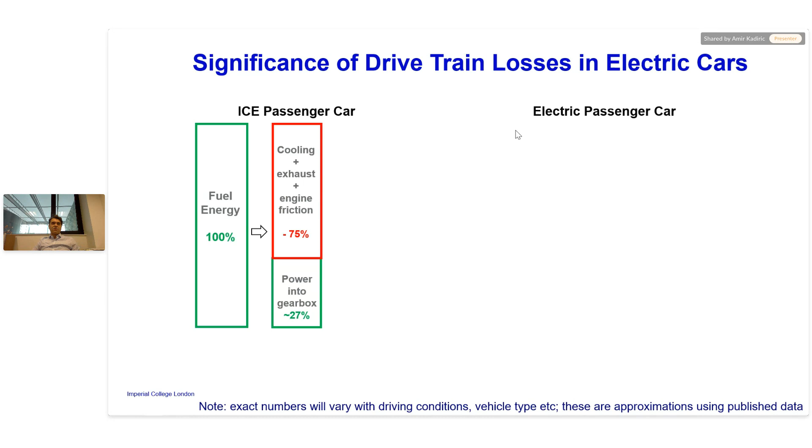So if we start with an ICE passenger car, you have the fuel energy. I'm not talking about where the energy is coming from, I'm talking about the energy on the vehicle. In the case of passenger vehicle powered by internal combustion engine, that's fuel, 100% fuel energy. And a lot of that, about 3/4, is lost in an engine through cooling, exhaust, engine friction, and so on. You can't do very much about that loss because the efficiency of an ICE engine is limited. So that means that only about 27, 25%, whatever, goes into the gearbox. From that, about 5%, thereabouts - those numbers can go up and down - but roughly about 5% is lost in the transmission of the gearbox itself. So the useful power driving the wheels is roughly about 22% of that fuel energy in the tank.

You probably know those numbers, but the interesting thing is if I look at the numbers in red here. If I add 75 and 5 and divide 5 by that, it's only about 6% of the overall loss of energy that's due to losses in the drivetrain.

If I do the same analysis for electric vehicles, starting with 100% energy in the battery, because the electric motor and controller are very efficient, and the charging and discharging process is relatively efficient - there are some losses, but overall only about 15% of that energy is lost. So 85% reaches the gearbox, as opposed to 27% or 25% in the ICE car.

If we assume the efficiency of the electric vehicle gearbox and that of the internal combustion engine vehicle are similar, I'm going to say 5% is lost. You could argue that's not quite right, but let's say it is. That means you have 80% of battery energy available to drive the wheels. That's a big difference, right?

22% versus 80%. But to us, the more interesting number is the ratio of this 5% over the overall losses, so 20%. That means up to a quarter of the overall loss is due to drivetrain losses in an electric vehicle. So clearly, one way to optimize the efficiency of an electric vehicle and extend its range, or for a given range reduce the size of the battery, is to optimize the drivetrain efficiency.

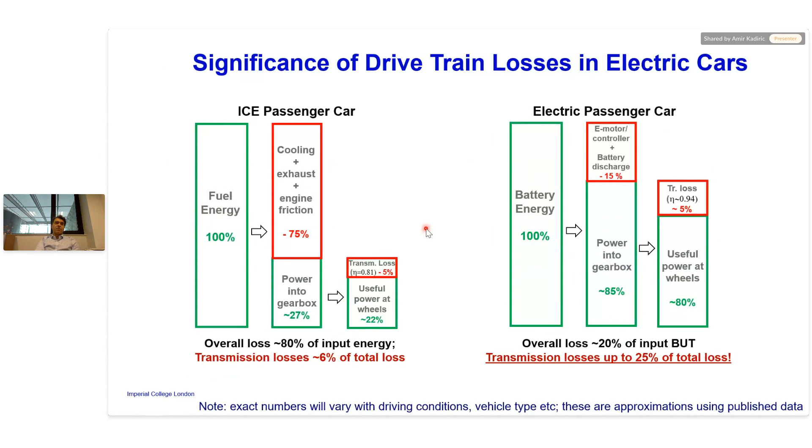I'm sure most people online are familiar with the architecture of an electric vehicle drivetrain, but just to show which part of this architecture we'll be considering for the rest of this talk - here's a simple picture of an electric vehicle, top left, with some batteries, power electronics, the electric motor, and the gearbox. These three parts are usually combined into something called an electric drive unit. A picture of a real electric drive unit is shown here - it's relatively small, much smaller than an internal combustion engine and transmission.

If you open this up and look inside, you see what's shown on the right-hand side. I'll go through it briefly. Here we have the electric motor - the rotor shaft and the stator. Then we have some transmission bolted onto it. The transmission is usually, not always, a two-stage single ratio transmission.

What we have is the input stage here, the input pinion, the intermediate shaft with the wheel and pinion, and then the output stage wheel. Then you have some differential, which drives the wheels. Each of those three shafts is supported by bearings - in this particular vehicle there are 7 of them because there's an extra bearing here.

In addition, you have some oil filters and heat exchangers to cool the oil. The pink color here indicates the oil, or what we often refer to as e-fluid - basically the electric drive unit lubricant. In this example, I'm illustrating that the same fluid is used to lubricate the gearbox on the right-hand side and cool the motor on the left-hand side. Hence I've used the same color everywhere. There'll be certain immersion depth and so on for the gearbox, but the color is just to show that the same fluid covers both.

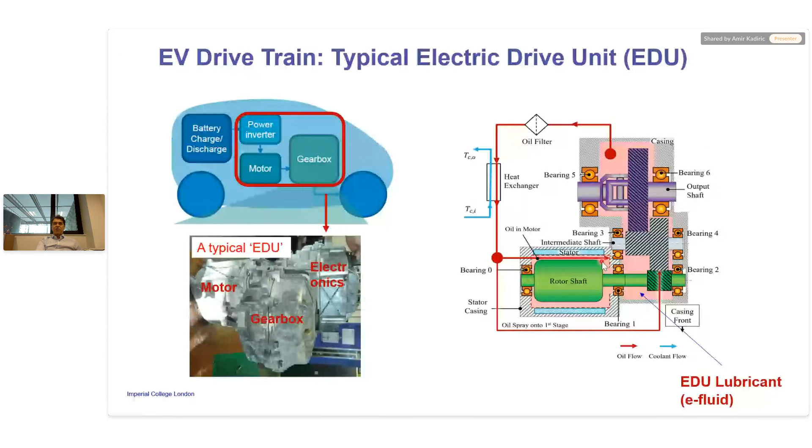So what we want to do is optimize this fluid. We also work in the Department of Mechanical Engineering, so we're interested in optimizing the actual architecture of this. But today I'll be talking mainly about optimizing the properties of this fluid in terms of efficiency.

So what are the challenges? I've got a list here, and I apologize that this slide is quite wordy, but hopefully you can read it for yourself. The main point to take away is that this e-fluid is subjected to competing challenges. Electric vehicle drive units operate at quite high speeds, because you want to run the motor at high speeds, reduce the size of the rotor, and so on. There are some very good arguments why you would like to run that motor at very high speeds.

What that means is that you're churning a lot of oil, and the bearings and gears are going at high speeds. If you want to reduce losses at those speeds, the generally accepted wisdom, which may or may not always be true, is that you need a low oil viscosity.

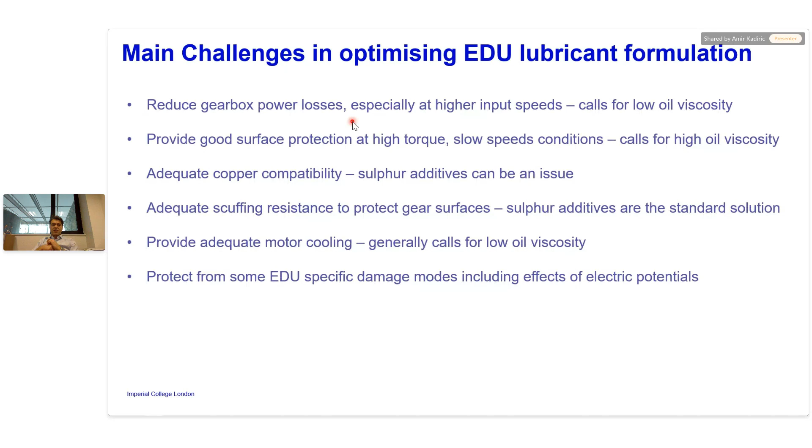Now on the other extreme, when you have very low speed, or you're just moving off with an electric vehicle, you're producing high torque just due to the torque-speed characteristic of an electric motor. To protect the surfaces under those conditions, where you cannot rely on a thick enough hydrodynamic film, you really need a higher oil viscosity - a specific formulation to protect surfaces in boundary and mixed lubrication. So you have an issue: on one extreme you need low oil viscosity, on the other you want high oil viscosity.

It doesn't stop there, unfortunately. If you're using the same fluid to cool the motor and lubricate the gearbox, you have to think about copper compatibility, so sulfur additives can be an issue there. But these gears can also scuff - scuffing is one of the most common gear failure modes, and if you have high loads and high speeds, scuffing becomes more likely. So sulfur helps in that respect.

So you have this competing requirement: do you put sulfur in, do you remove sulfur, high viscosity or low viscosity? Where is the optimal? Clearly you can't satisfy all of those at the same time, and that's an important message to take away. The e-fluid properties have to be a compromise to address these system-level competing challenges. They're not necessarily the best solution for any one of those challenges, which is a bad thing, but also a good thing in a way, because it opens up the possibility of using some unconventional fluids in these units, as we will discuss a little later.

You also need to cool the motor, so that also requires usually a low oil viscosity as well as high heat capacity and so on.

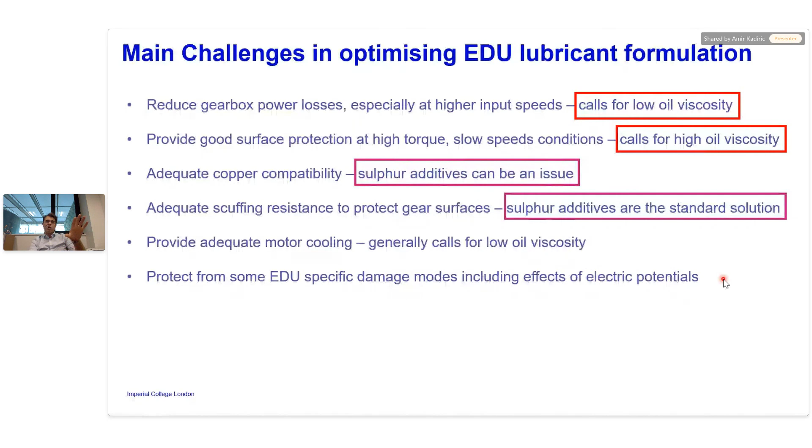And finally, while considering efficiency, we mustn't forget that we also have to at least keep the same level of reliability. We need to resist certain damage modes like scuffing, and of course other standard damage modes for gears and bearings - pitting, micro-pitting, and so on. But in electric vehicle drive units there's a specific damage mode due to electric potentials, which is another area we are studying - I'll touch on it a little in this talk, though the talk mainly focuses on efficiency. Whatever e-fluid you choose has to deal with reliability.

So it's a bit of a mess - it's a fast-moving area. There's a huge amount of research in this, because all of a sudden we have these different requirements, and we can't use the fluids that we've been using for tens of years in internal combustion engines.

So there's an opportunity there for somebody to come up with a fantastic fluid that can do all of these things, but it's also a challenge. To aid those challenges, we do need some new tools to find out what is this balance between these competing requirements on the system level. What we are trying to do, and what I'll show you today, is how we're using tribology to try to find this optimum compromise by considering the whole system.

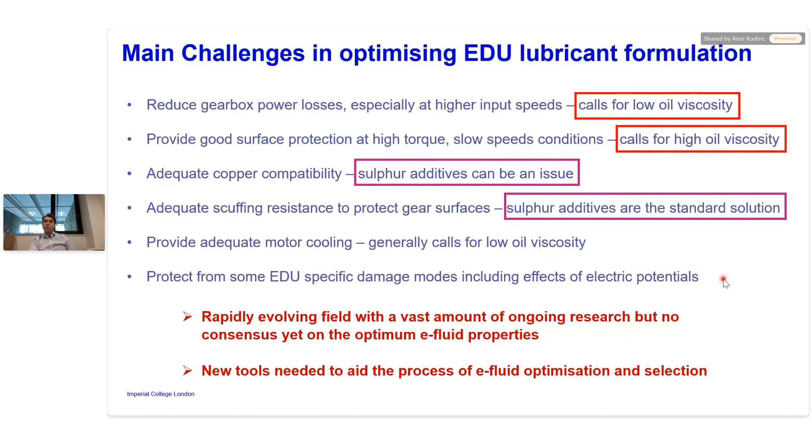So what are the main tribological challenges in doing so? I've listed three here. There are many others, but I think those three are quite important, kind of ranked. The first one is the high speeds.

Unfortunately, the speeds encountered in electric drive units are higher than most current tribometers have been designed to deal with, which means that if you are testing frictional wear properties of particular fluids, we can't reach the speeds that these electric drive units—the gears and bearings in the electric drive units—operate at. So we need to think a little bit about how to address that, and I'll show you what we've done in that respect. We are getting there. There are some new test rigs that allow us to do that better.

Number two: well, we are tribologists, so if you go to a store and buy oils that have the same specifications, we like to think that we can tell a difference between them. Otherwise, we're wasting our time because they're not the same in terms of friction, in terms of wear.

Now, if you want to distinguish between two same-specification oils in terms of the impact on overall losses on an electric vehicle while it's being driven through London, it does require a quite detailed analysis from a tribological point of view, where those losses come from. And crucially, absolutely crucially, it requires measurements to characterize those fluids. So even though the specs are the same, they certainly have differences in terms of overall EV efficiency, as you will see later.

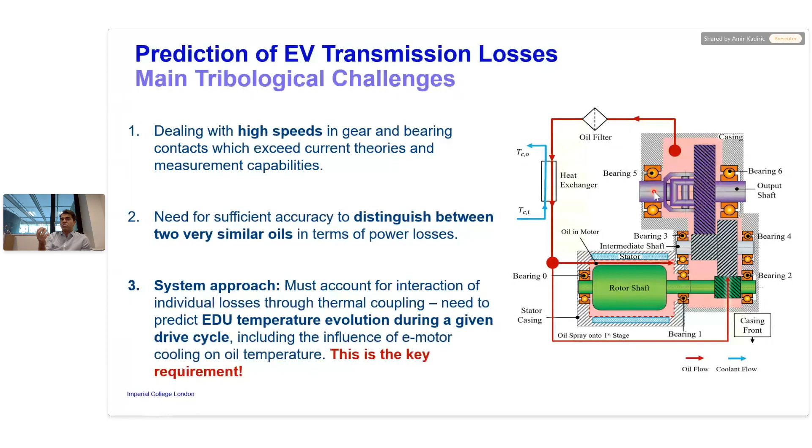And the idea is to end up with a number of kilowatt hours energy loss, because for most manufacturers it's kilowatt hours that matter. That's equivalent to dollars. So number 3 is really the key requirement: a system-level tribological approach to predict the evolution of the EDU temperature and hence the interaction between these losses. This is why it's important.

What I have here is an example from a simple gearbox—not from an electric drive unit, but a simple one-to-one, single-stage gearbox that illustrates this. As you have losses in bearings, gears, and churning, the oil temperature in the gearbox will change. It will increase, and as that increases, it will change the oil properties, primarily the viscosity, as well as other properties. That means the friction in the gear teeth contact, the drag losses in bearings, or the churning will change. So your power losses are now different, and you're pumping a different amount of oil in here.

In a normal gearbox operating at steady state torque and speed conditions, say driving a fan, the calculation is quite simple because you reach an equilibrium temperature depending on the ambient conditions. You can then use those operating equilibrium temperatures to work out your oil properties and hence your losses.

Unfortunately, in a moving vehicle that's not the case, because the torque and speed going through the gearbox are changing non-stop. So the temperature of the gearbox is evolving.

What I have on the right-hand side is a simple gearbox where we started at 25 degrees, and we've evolved the temperature as the gearbox is operating at 0.6 hours in this time. In yellow are the total losses, so I've added all the gear losses, all the bearing losses, all the churning losses.

But the bottom two curves are the interesting ones. What you see is the mesh loss in gears going up as the temperature has gone up, while bearing loss is going down.

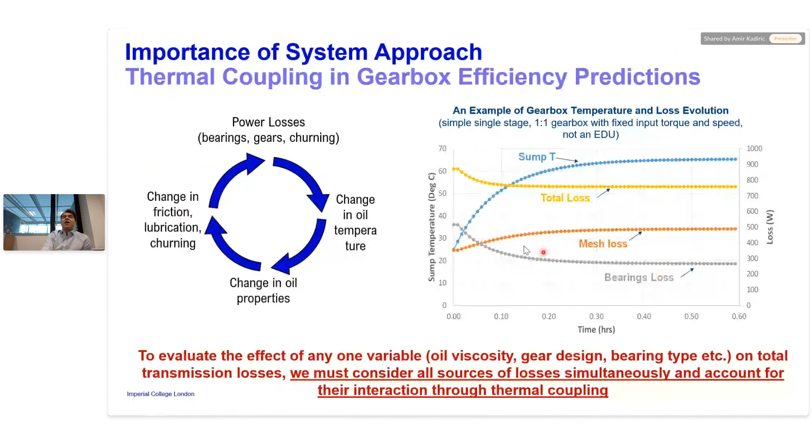Whereas bearing losses, which we generally tend to have smoother surfaces than gears, like lower viscosity, so the losses in bearings have dropped. This needs to be accounted for on a system level throughout the whole duty cycle if you are to optimize the e-fluid. That's what we are trying to do with this tribological system level approach.

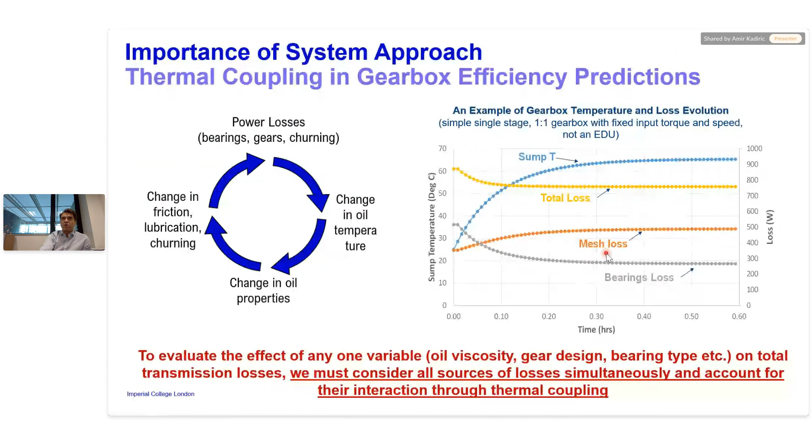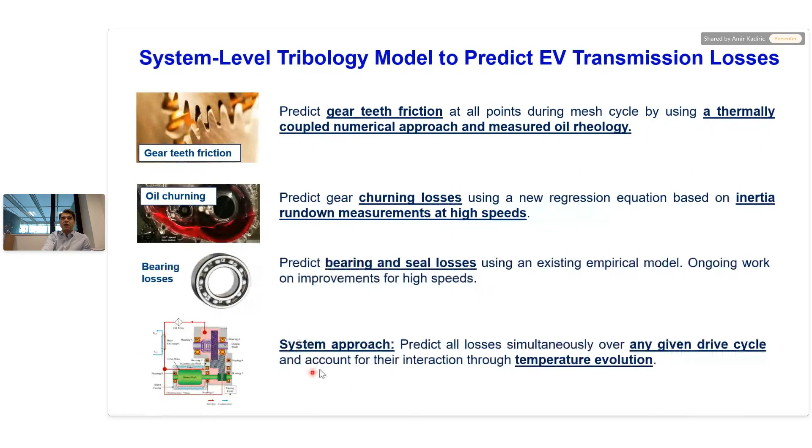So I'm going to consider gear teeth friction, and I'll show you how we do this. I'm going to consider churning losses, and I'll show you a bit how we do this because it's different from published sources—we recently published our own work on that. I'll tell you how I do bearing and seal losses, which is based on existing models that we're working on improving, but at the moment we're using other people's existing models. Finally, I'll tell you how we combine them all into the system level approach.

So first of all, gear teeth contact losses. There's a little bit more tribology here than in the rest of this talk, for those of you interested in more technical detail. We are using a relation between shear stress and shear rate for a fluid.

In this case, I'm using a Johnson-Tevaarwerk relationship. You can plug in your own one if you don't like this one—it's a plug-in to the model.

What this does is: for given conditions, given shear rates, for a fluid expressed with its viscosity and some of these constants, I will get the shear rate, and then this shear stress. If this shear stress is higher than some critical shear stress, I'm having a limit of tau equal to tau-c.

This viscosity here is the viscosity of the oil at the temperature of the contact. So in the diagram here we have the two surfaces, and we have the oil in the middle. The temperature here in the contact, indicated by this T-oil, red circle, is the temperature we need to work out this viscosity.

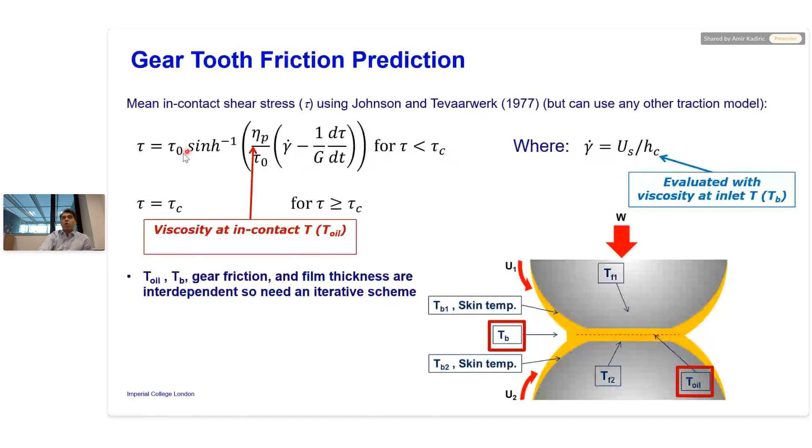The shear rate, gamma, shown in this equation on the right-hand side, is worked out by sliding speed divided by central film thickness. The central film thickness needs to be worked out or measured at the temperature of the inlet. So you have these two temperatures that you need to work out for a gear teeth contact in order to work out a relation between shear stress and shear rate.

Now this requires an iterative model. We use an existing model by Olver and Spikes, two colleagues of mine, and also an update from a postdoc of mine, Rycerz, and myself, published in 2019, along with some COMSOL Multiphysics input to work out a heat transfer coefficient.

You can imagine this is quite a difficult calculation because your gear is operating in some complex mixture of air and oil. What is the heat transfer coefficient used to work out how much heat is being lost from the gear, and hence get the equilibrium between the heat being pumped into the contact and being lost, to get a bulk temperature, which is what we need in order to get this relation between shear stress and shear rate.

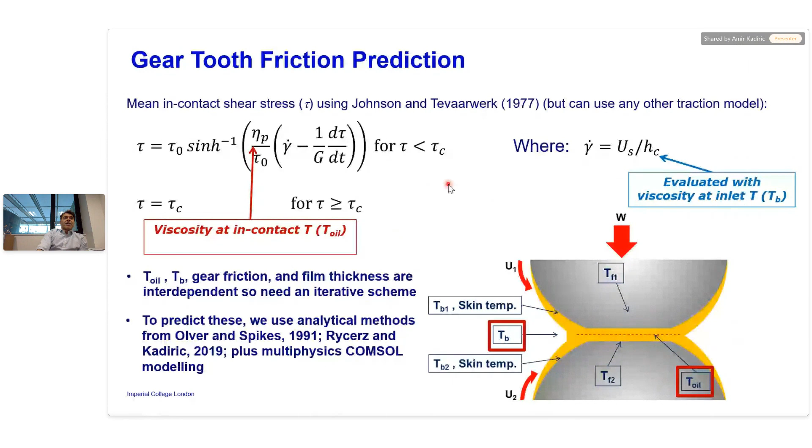Then we get our tau bar, and then we put it into this relation.

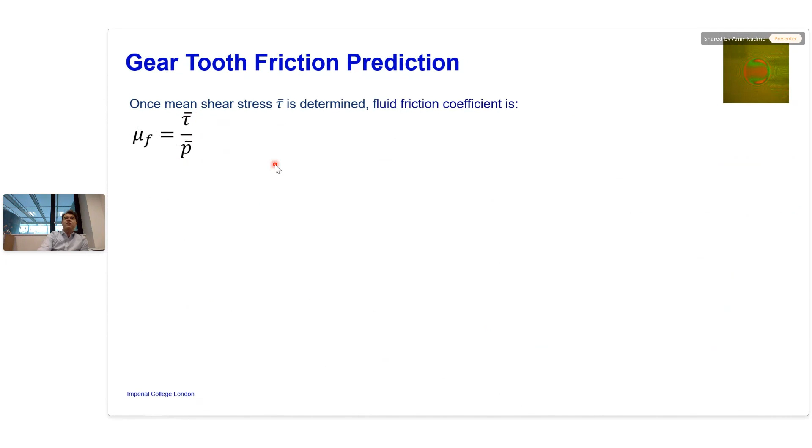We divide the mean shear stress, tau bar, by the mean pressure to get the fluid friction. This is very nice, it's fluid friction. Unfortunately, gears don't often operate in full fluid film, not in full EHL film, because they're rough.

So we need to account for the boundary and mixed lubrication friction. In our model, this is how we do it. The effective overall friction coefficient equals the fluid friction we worked out using that relationship I showed you earlier, plus this term, which says it's boundary friction minus fluid friction divided by 1 plus lambda, lambda being the specific film thickness, the ratio of the film thickness to the surface roughness, to some exponent m.

Effectively, what this does is shown in this graph on the bottom right. These are measurements for different surface roughnesses, friction coefficient on the y-axis, difference between smooth and rough - you can just consider it as a friction coefficient - and lambda ratio here. So this relationship effectively fits the friction between the boundary friction shown here at low lambdas, to the fluid friction shown here at high lambdas.

I'm really sorry because this talk is actually going through itself. I can't stop it.

So you can see that this term, as lambda increases, becomes 0, so our friction is just mu f. And as lambda becomes very low, this becomes mu b minus mu f, and mu f cancels, so we get mu b. So we're basically fitting between mu b and mu f.

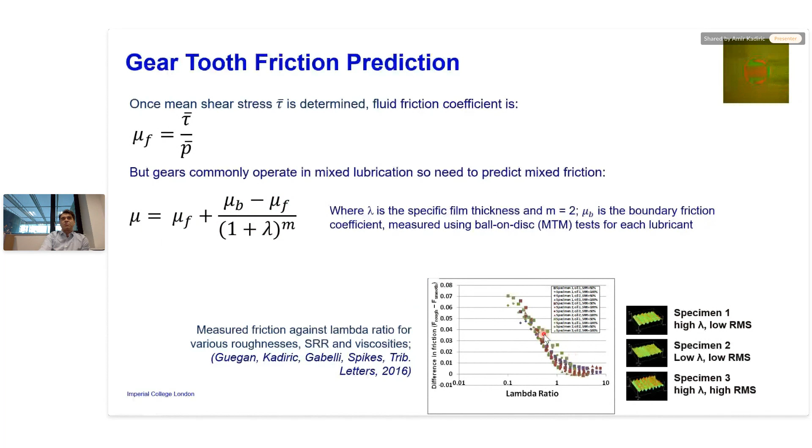Works quite well. We do measurements for our fluid together. The other measurements we do for the fluid are to characterize the rheology of it, and the way we do that is we measure friction coefficients at different pressures, different temperatures, different slide roll ratios, using our ball and disc tribometer, the PCS Instruments MTM.

In this case, we actually use the scaled up version of MTM called ETM, Extreme Traction Measurement Machine, which is very similar, but allows us to reach higher pressures - up to 3 gigapascals for steel and steel contact. So it's a little bit more realistic in terms of conditions that may be experienced by bearings and gears in an electric drive unit.

In parallel, we measure film thicknesses on an optical EHD rig by PCS Instruments. What that then allows us to do is plot a shear stress relationship, which is this mean shear stress, tau bar equals the friction coefficient times the mean pressure on the y-axis, and on the x-axis we plot the shear rate, gamma, which equals sliding speed divided by the central film thickness.

We can then get the gradient of this curve to get our limiting shear stress, tau zero, and get that relationship I showed you in the beginning from this curve. On the right-hand side here you have thermal effects, which you can, but don't have to, account for. Then we can plug our worked out mu f back into this equation, but we also measure the boundary friction coefficient mu b. Now, this is all very nice, and we've been doing this quite a few years now.

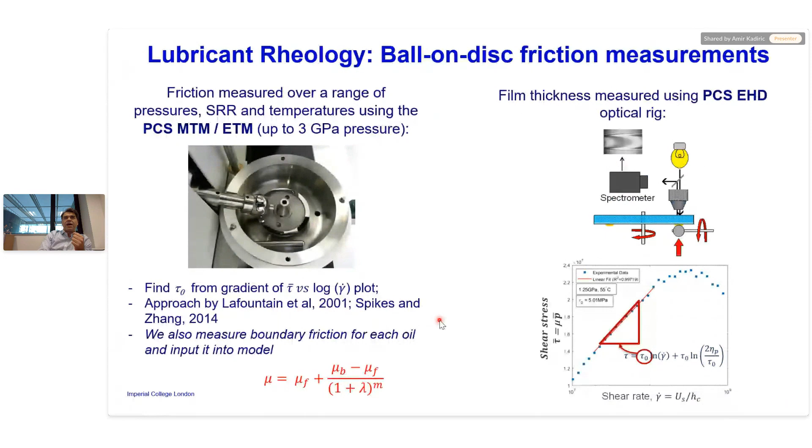I think this method was first done in 2001 and has been updated since. But what you find is that because of the high speed conditions in electric drive units, the normal tribometers I showed you earlier don't really do that very well.

So we've recently started using this high speed tribometer, which is similar to the normal EHD, but runs at 20 meters a second, to measure film thicknesses and traction at speeds much more representative of real electric drive units. So here's a typical electric drive unit.

Bearing entrainment speeds are up to 26 meters a second. Gear entrainment speeds are 18 meters a second. The previous tribometers only go up to 4 meters a second, but this new one does 20 meters a second. I'll show you some results from it.

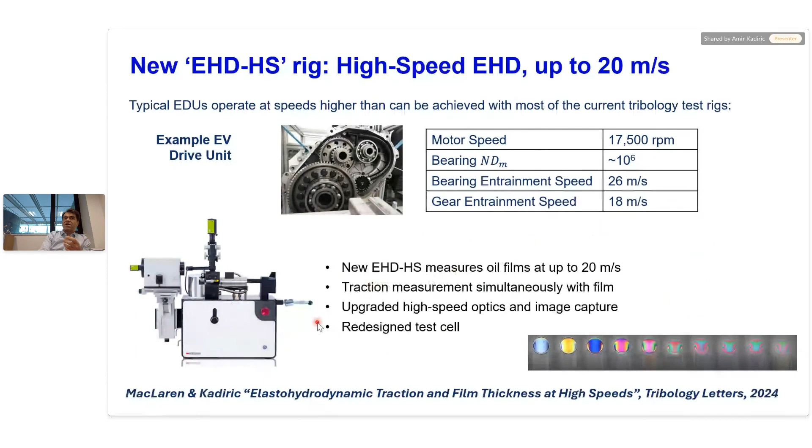This is published work. We've got some film thickness and entrainment speed measurements, very high speeds, up to 20 meters a second - this is recently published, Alex MacLaren's work. You can see that the measured film thickness, shown in these curves, deviates from the predicted film thickness, shown in orange, as the speed increases.

Interestingly, the deviation starts roughly at about 4 meters a second, which is the limit of the existing tribometers. So our current EHD theories don't predict this drop-off. There are compensating factors - some of you might have used things like the Gupta factor and so on.

They don't really predict this very well. They're usually too conservative, but not always. On the right-hand side, this indicates the level of difference between the measurement and the prediction - this is the film thickness deviation percentages, slide-roll ratio, and entrainment speed. You can see in some cases, for some oils - this is a PAO5 oil - you can get a massive difference, up to 40-50%, and in other cases it's less. This is the extremes, if you like. You can see up here, it's very low at low speeds.

So we use this high-speed tribometer to get our friction and film thickness and plug into our model.

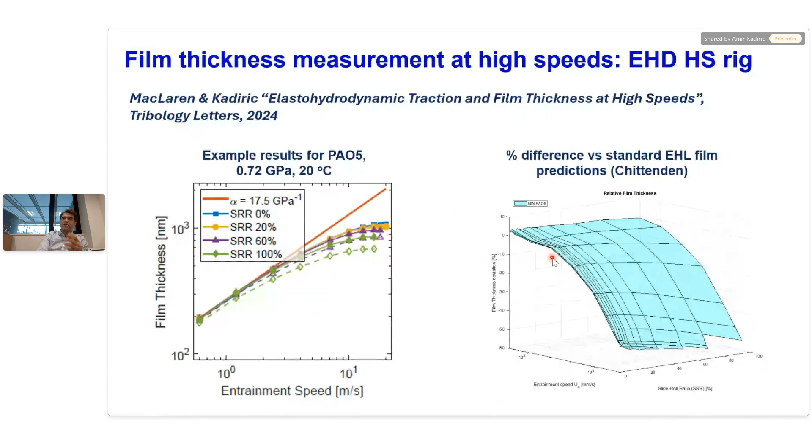Now, that's gear friction. Bearing friction, as I said at the beginning, we use an existing model, due to Guillermo Morales-Espejel at SKF. This is a published model, it's in the catalogs. They call it a four-source bearing friction model because it includes the rolling friction, sliding friction, the seal friction, and the drag losses in a bearing. So this is, if you like, equivalent to gear churning. So when I show you bearing losses later, that includes the bearing churning losses, and when I say churning losses, I'm referring only to gear churning losses.

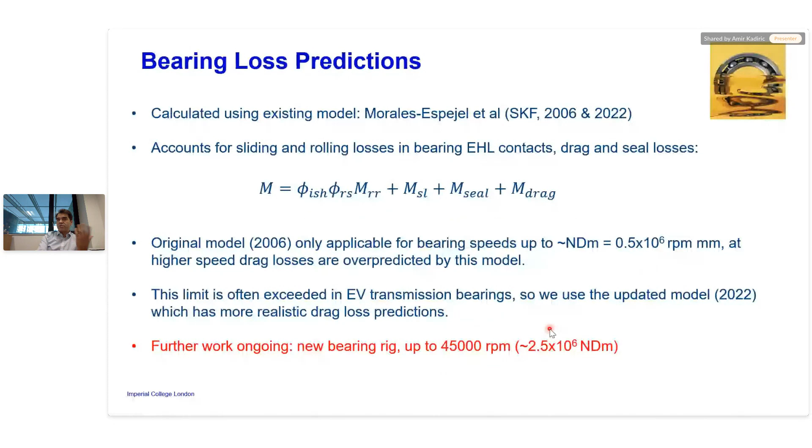The original model was developed by SKF in 2006, and they are at pains to tell the world not to use it if your NDM parameter - which is the bearing RPM speed times the mean diameter in millimeters - is over 500,000. The reason is that at higher speeds this over-predicts the losses because the M drag is over-predicted. They've recently published an update to this model with factors to account for this - not physics-based, it's an empirical factor. So we've been using that model in our current predictions that I'll show you later. However, we've got a substantial amount of work trying to optimize those bearing friction predictions at higher speeds, including a new rig that we can run up to 45,000 RPM or 2.5 million NDM, much higher than the current limit, so that we can apply these measurements and a better model into our EDU loss predictions.

The gear churning losses is the third part of this overall system approach, and here we are relying on our own measurements. The reason for this is that the current published gear churning models, which are empirical, are based on data that doesn't go high enough in speed - usually about 7,000 RPM is the limit. We need to go higher because the speeds in electric drive units are 15, 20,000 RPM.

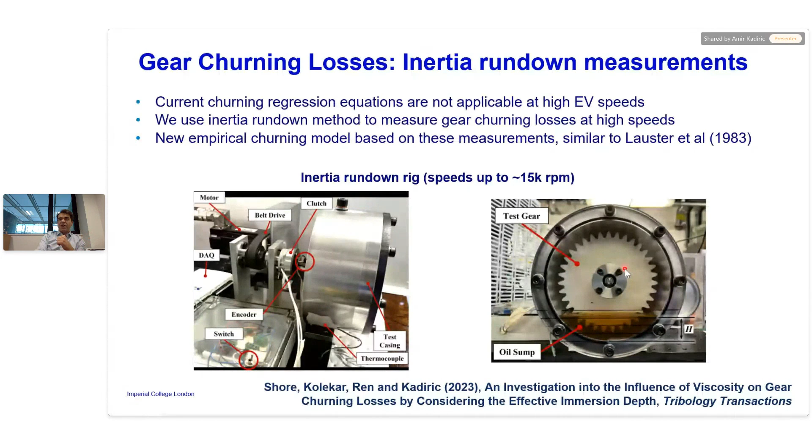So we've done our own measurements, and the way we've done it, we have a simple plastic gear in this case, in this annulus, and we have a sump of oil here. We change the oil, we change the immersion depth, and so on. We get loads of measurements done for different oils, different immersions, different geometry of the teeth, different face width of the gear, and so on. And then we produce our own regression equation, and we use that regression equation, which goes to much higher speeds, in our models. It comes up with some really interesting things, and I want to show you briefly what those are.

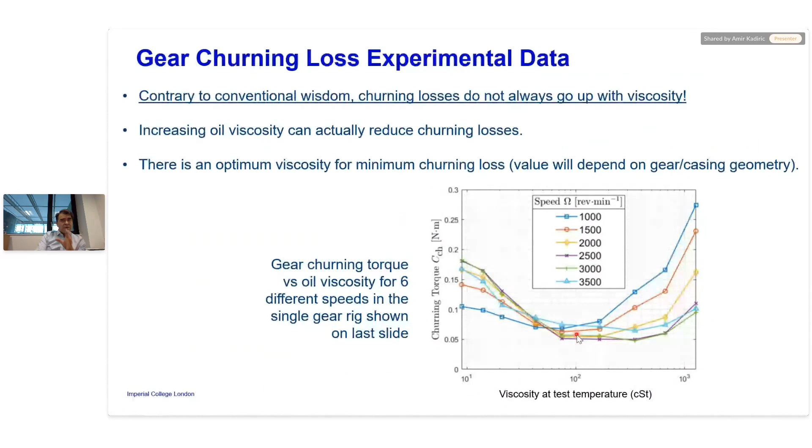What you see is this focus on immersion depth here. This is the oil. We started in each case with each oil at the same immersion depth. This is zero speed. As you run the gear at higher and higher speed, the oil is being thrown up. Some of it comes back. So during actual operation, there's a certain effective immersion depth.

What that effective immersion depth is depends very much on the viscosity of the oil. If you look at this effective immersion depth for low viscosity PAO2 oil at high speed, it's quite similar to the initial fill. If you look at the high viscosity oil, that was the initial fill, but look at it here - your effective immersion depth is very, very small, almost zero. What that means is you're actually going through a smaller amount of oil, smaller depth of oil, and that reduces your churning losses.

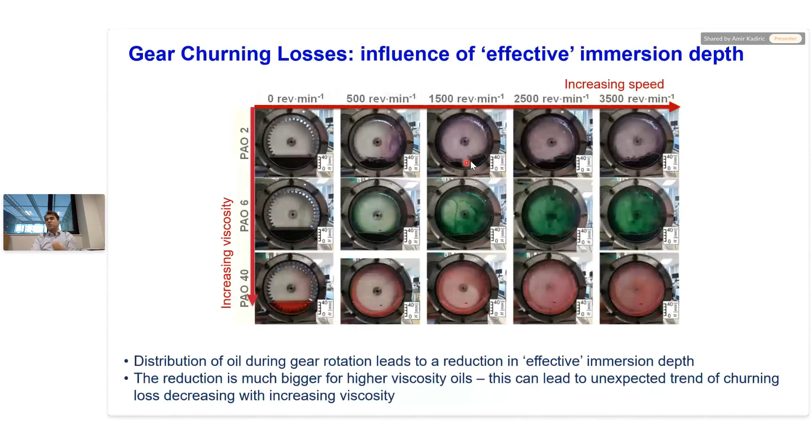Now you might think this is actually specific to this rig, and indeed the absolute values of churning loss are specific to this rig. But we actually did it in a real electric drive unit. So here's a real electric drive unit. The way we do this is we spin up this gear to a certain speed, then we disconnect it and let it slow down due to this churning loss, the drag of oil. And then from the speed-time graph, we get a churning torque. It's called the inertia rundown method. We did the same method here.

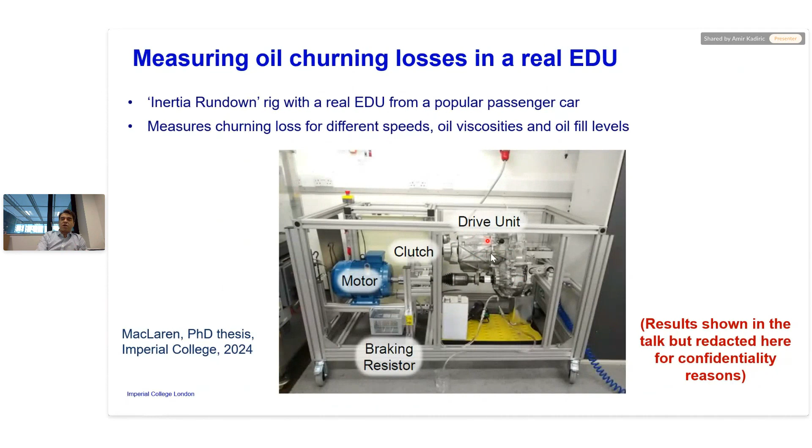This is work of Alexander MacLaren during his PhD. We have an electric drive unit from a popular passenger electric vehicle connected to a motor. We spin it up, we disconnect it with the clutch, we let it slow down - same method as the other rig. Indeed, what Alex found is the exact same phenomena.

These are different speeds, so different vehicle speeds, different RPM. Let's focus on one of the speeds - take this top one, 120 miles per hour, very fast. You can see that initially the torque goes up with viscosity and then it drops, and then it goes up again. So it's not the same place in terms of viscosity, not the same speed and so on, but the fact that you see the drop - generally the trends are the same.

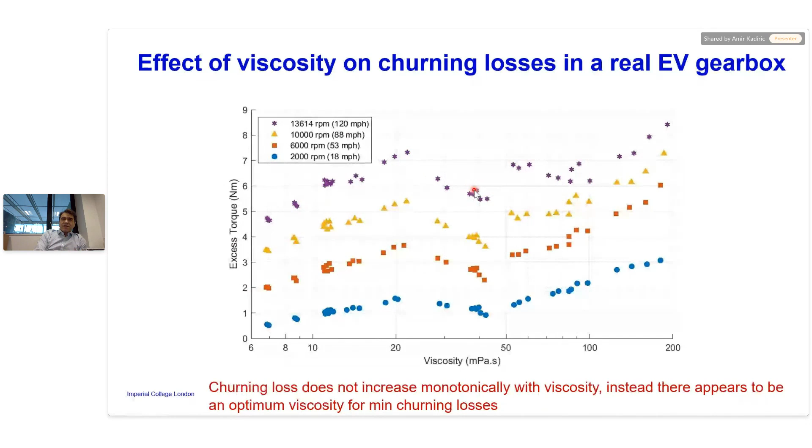In the same gear unit, Alex also varied the immersion depth. This is important because you find that the biggest effect on gear churning losses by far is the immersion depth, not the viscosity. Compare either the red or the green curve - let's look at the red curves. They are at the same speed, 88 miles per hour vehicle speed, 10,000 RPM gearbox speed. So you've got a 1 liter and 2 liter fill of the gearbox - 2 liters is really what it's filled with. You can see this is the churning loss for the 2 liter, and this is for the 1 liter - a big increase, double. So the effect of immersion depth is much more pronounced than the effect of viscosity.

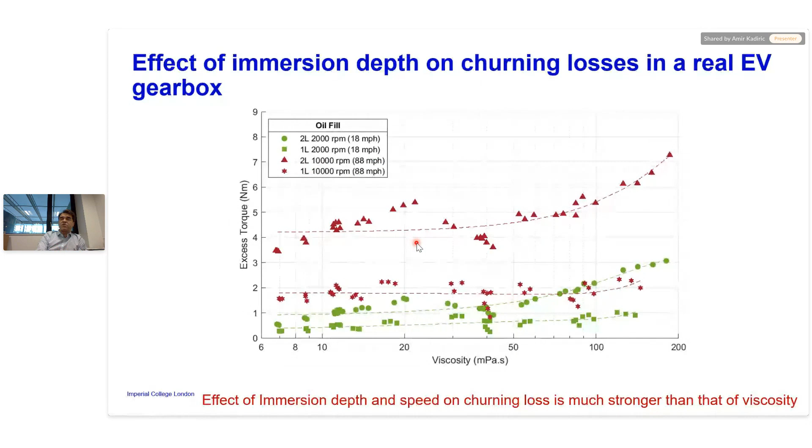The trends we see in terms of churning loss versus viscosity are the same in both our lab rigs, with a single gear and a full electric drive unit.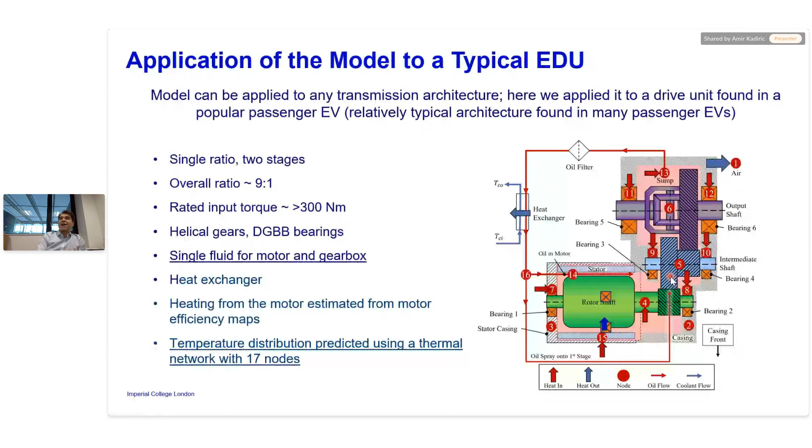To address this temperature evolution and interaction of the losses, what we implemented is a thermal network model. These numbers are the nodes of our thermal network. We work out the losses at each of these points - bearings, gear meshes, and the churning - and the heat exchanges at each point, including in the motor because of the cooling of the motor, in the heat exchanger, between the gears and so on. We allow them to talk to each other to get the overall evolution of temperature as the car is being driven. What Joe and Alex then did is drove that specific vehicle through this route, and the car was instrumented with lots of thermocouples in the transmission.

We can't measure losses in an operating vehicle, but what we can do is measure the temperatures in different locations within this electric drive unit, and from there infer the power losses. The higher the power losses, the higher the temperatures. We'll be inferring the power losses, but the relationship between power loss and temperature is pretty strong, so it's a good comparison.

What I'm showing you on the right-hand side is the speed profile and the torque profile for this particular duty cycle that they drove the vehicle through. This is not a standardized duty cycle, it's a real-world duty cycle. We then put these speeds and torques through our model, that characteristic of that vehicle, the electric drive unit, and this is what we got.

What I've got here is 5 comparisons for 5 of the nodes that I showed you here. So bearing 5 is here, node 12, and this is the comparison, and then we got bearing 6, heat exchanger, oil output. All of these are measured in blue and predicted in orange. You can see that our model is pretty good at predicting temperatures within this electric drive unit for this particular lubricant, this particular drive cycle throughout the gearbox.

Frankly, I was actually a bit surprised at this. We have improved this over time, so these are the latest predictions. There are some differences at high speeds, and we have a rough idea why that's happening, so we're working on improving that further. But it's pretty good, so we're quite pleased with this in terms of validating our model.

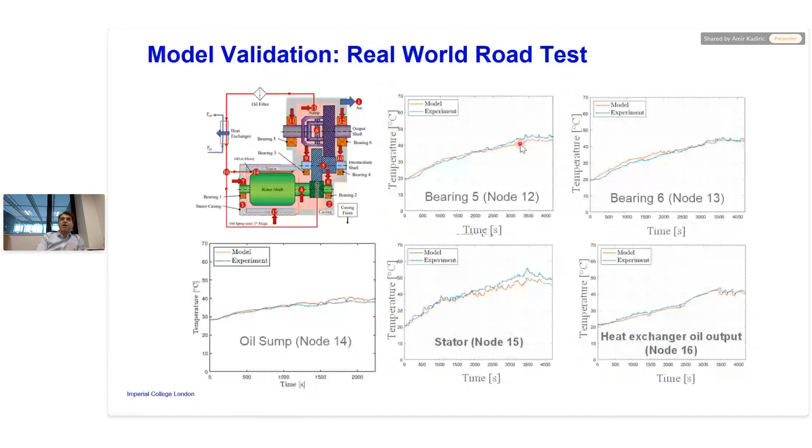Having validated it, we then took that model and tried to analyze the efficiency of the electric drive unit for different oils. The first thing we did is take two oils, experimental fluids, not real commercial fluids. We call them oil A and oil B. Very similar, so these are the viscosities at 40 and 100 degrees: 29.4 and 5.9 centistokes versus 27.3 and 5.9. So roughly Dexron 6 specs. It's an ATF - I've deleted some of the property figures here because this is a recorded webinar.

These are experimental fluids. Measured boundary friction coefficient is 0.118 and 0.13 for oil A and oil B. So it's different chemistry, different additives. The base fluid is slightly different as well, but they satisfy the same specs. You could take one oil and replace the other oil in your gearbox, in the electric drive unit, because they satisfy the same specs. This is what we got.

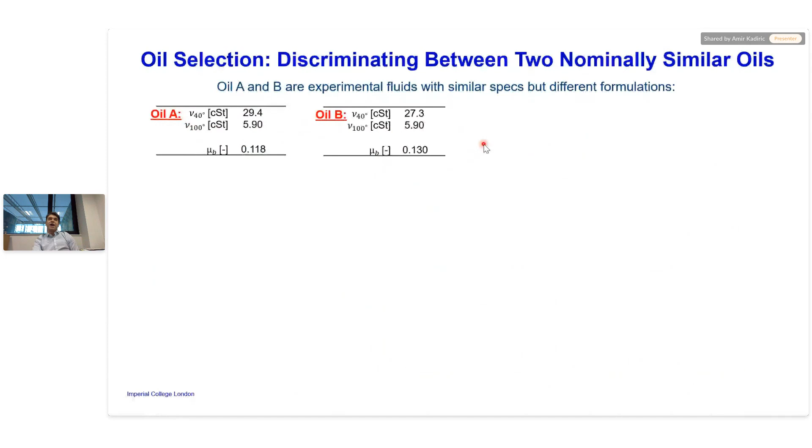So what I have now is a WLTP cycle, a standardized cycle that manufacturers will publish their efficiency figures over. I'm sure you've seen this - this is the vehicle speed over time for a standardized WLTP cycle. We run the vehicle through this cycle with these oils. Remember, we measure the properties of the oils, both the rheology and boundary friction coefficient. We're trying to tell the difference between them over the WLTP cycle.

Here you have the evolution of temperature, this black line, plotted on the right-hand side, and the individual losses. In yellow, bearing loss; in orange, churning loss; and in blue, gear loss in an electric drive unit for that particular vehicle. You can see how they evolve over time. The bearing losses dominate. At higher speeds, churning loss becomes significant. Gear losses as a proportion are less, but at lower speed the gear proportion is much bigger than at higher speed, and churning loss is smaller.

And this is for oil B. You can't really tell the difference between oil A and oil B here. However, if you add it all up - remember what we're after is kilowatt hours, because kilowatt hours means dollars - you find that oil A is about 2.5% better than oil B, largely because of its lower boundary friction coefficient, giving you lower overall gear losses. The other losses are quite similar.

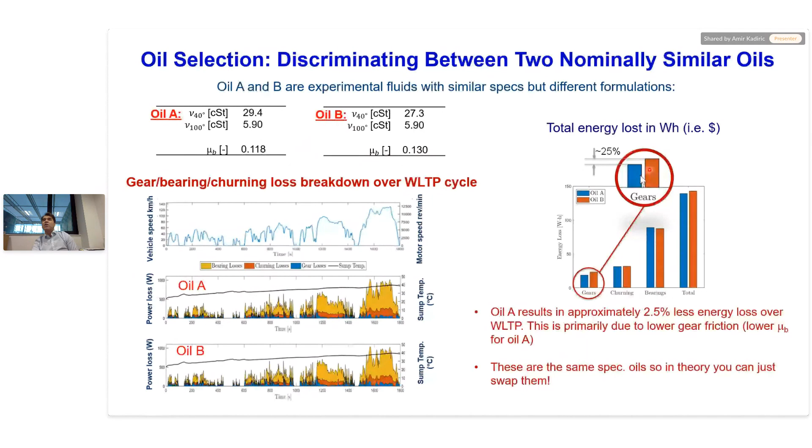The biggest difference is in gear losses - remember gears operate in mixed lubrication, so it's the boundary friction that made a difference. If you did a third formulation that reduced the bearing losses, you could probably do even better. But in this particular case, between these two oils, we were quite pleased to be able to see a difference, even though they're the same spec oil, so you could just swap them directly.

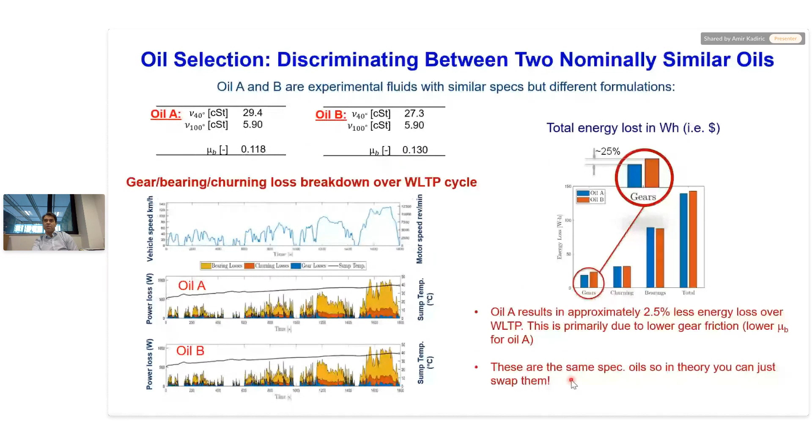For the WLTP and that particular unit, it's around 3 centistokes. If you go any higher, the bearing losses go up - bearings like low viscosity oil, so that's not good. If you go lower this way, your gear losses go up. There's an effect on churning losses as well, but gear losses go up. So going down to crazy low viscosities of 2 centistokes, 1 centistoke, is not going to help you.

That was quite an important result. There is an optimum viscosity, which is relatively low for this particular cycle and this particular gearbox, but it isn't 0, it isn't 1 centistoke, it isn't 2 centistokes. There is an optimum that we can predict. However, this is specific to the gearbox, specific to the cycle.

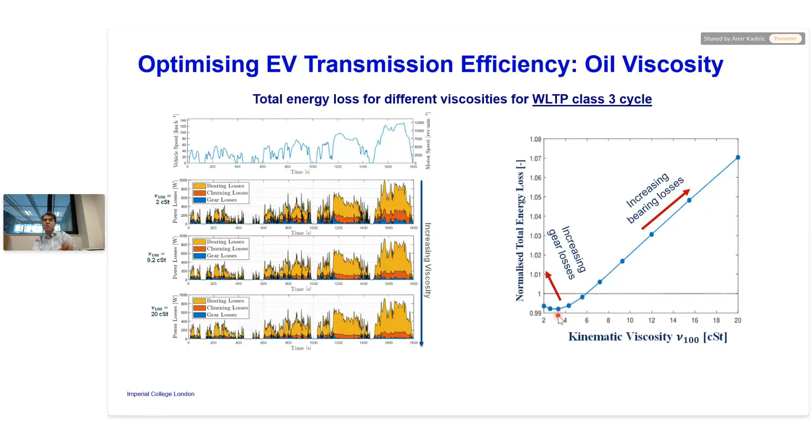If I change the vehicle duty, which is what we did next - this is the same results on the previous slide, standardized WLTP cycle, which is the one they use to publish efficiency figures. We took another standard cycle called Artemis. Some of you might have seen this. It's an urban cycle where you have more rapid changes in vehicle speed, more acceleration, more deceleration, and so on.

What happens then, if you do the exact same calculations, the optimum viscosity is different. All of a sudden it's closer to 5.5, 6 centistokes, at 100 degrees. If you drive your vehicle through London and I drive my vehicle through London, we probably need different viscosity in our cars because I'll drive differently from you.

If you drive the vehicle in London versus in, say, Yorkshire, you probably need different viscosities. We can't account for all that, but it's an important finding - an important consideration that there isn't really an optimum viscosity for all duty cycles, for all transmission designs and so on. They will vary depending on what the vehicle is doing. And the important thing is also that there is an optimum.

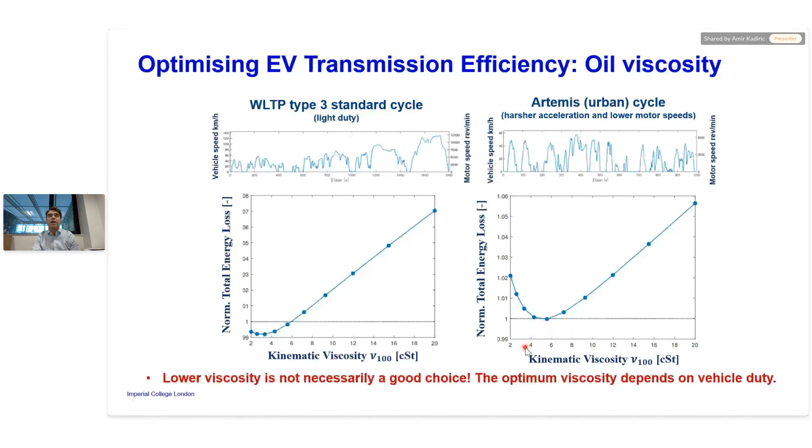We can change other properties. One thing we did is change the thermal conductivity of the oil. Remember at the beginning I said the job of this oil is also to cool everything, including the motor. So there's a lot of research going on in terms of trying to increase the thermal conductivity or heat capacity of the oil in order to drop the temperature of the motor, because the idea is that the lower the motor temperature, the more efficient it is.

We struggle to find published figures on the effect of temperature on the efficiency of the motor. So in this particular model, we do include the heat exchanges in the motor and the efficiency of the motor, but it's at one single temperature, from published figures - we don't model it ourselves. But what we can predict is the effect on the motor temperature of a change in the thermal conductivity of the oil, and you see that in this curve.

The stator temperature is shown in orange for different thermal conductivities, same viscosity - this is oil A, which I showed you before - and the sump temperature here in blue. You can see as I increase the thermal conductivity, there's quite a big drop in the motor stator temperature, about 5 degrees. That sounds little, but it's a significant effect, I'm told - I haven't seen the figures - on the motor efficiency. We are working on getting those figures.

So the higher the conductivity, it appears, the better. So why don't we use a high thermal conductivity, high thermal capacity fluid, such as water? And indeed, there are attempts to do that. Pure water is here, but of course you can't put water in a gearbox - but you could put some water-based lubricant, which would take you somewhere in this region, about 0.4 and so on. So water-based lubricants are being researched, including here at Imperial, for application in EDUs.

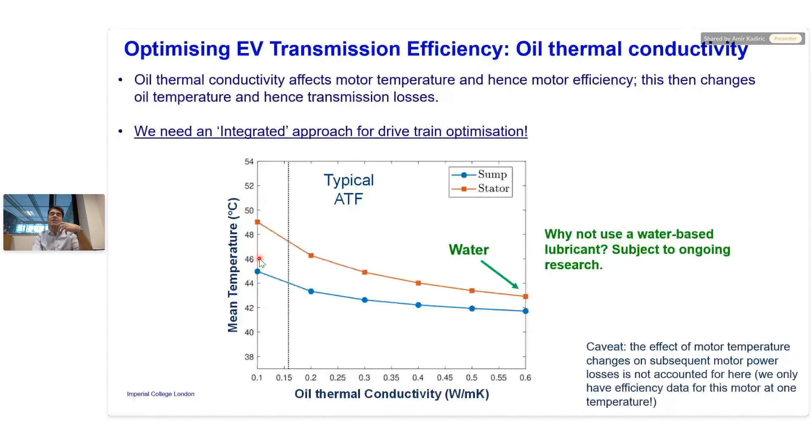Finally, what I just want to tell you is that it's all very nice optimizing these fluids to increase efficiency, but you mustn't forget reliability. We are working on that in parallel. I don't have time to show you all of the work in terms of surface damage modes, micro-pitting and pitting that we are doing.

That's a major area of research in my group. What I want to show you is some work that's specific to electric vehicles, where we are looking at the damage caused by small electric potentials. In an electric motor, electric drive unit, there's a source of electric potentials, there are stray currents, and people are finding damage apparently induced by the presence of these voltages and currents. Now, we've known for decades that high current density discharge of current destroys the surface.

We understand this. What's interesting is what the small voltages do. That hasn't been researched, particularly what they do in mixed lubrication conditions for gears and bearings, not in full film where discharge is the dominant mode. So what we have is a setup where we apply voltage across the ball and disc contact, and this is the rig. We basically have the small MTM instrumented - it's MTM EC - that allows us to control this voltage across the ball and disc contact, and also allows us to look at the development of the films.

If you're interested in this, you'll have to read some other literature. But what we find is that application of very small voltages, 5 volts, affects, in this case, performance of ATF. On the right-hand side, 0 volts means non-electrified, and then it's 5 volts, either as a cathode or anode - so we can swap the polarity - and this affects the wear massively. When the particular lubricant formulation, ATF, is as a cathode, we get huge amounts of wear, quite a lot as an anode, but much less, and the smallest amount when it was non-electrified.

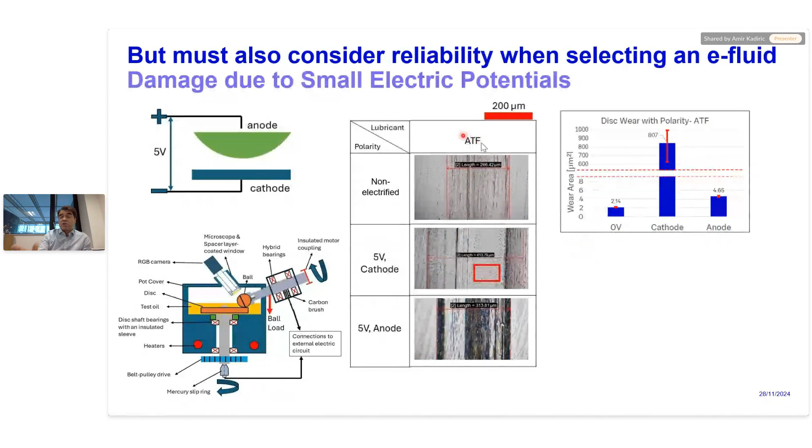So in this case, it's an ATF, which is a formulation you could use in an electric vehicle. We're also monitoring the evolution of boundary film, and that is also affected by the presence of voltages. But I'm not showing you ATF evolution here because it's not very obvious. I'm showing you ZDDP containing oil. ZDDP containing oils are not used in EVs - this is just to illustrate the potential effect.

We have non-electrified, 5 volts as a cathode, and 5 volts as an anode, and you can see that these colors indicate the development of boundary film. Indeed, the anode is very different from cathode, and cathode is quite similar to non-electrified. So there are different effects going on here depending on formulation of the oil. It's really important to say that the effect on ZDDP containing oil versus ATF containing oil is very, very different. There's an effect of polarity, an effect of voltage magnitude and current magnitude, but we are doing this in parallel to the efficiency work in order to tick both boxes: increasing efficiency, improving reliability.

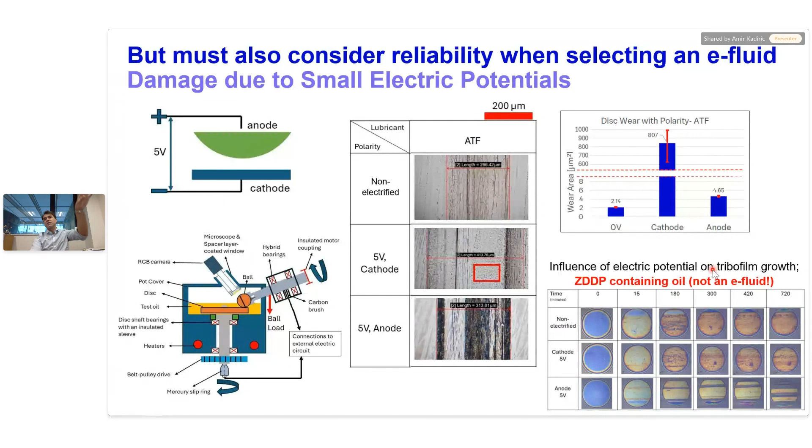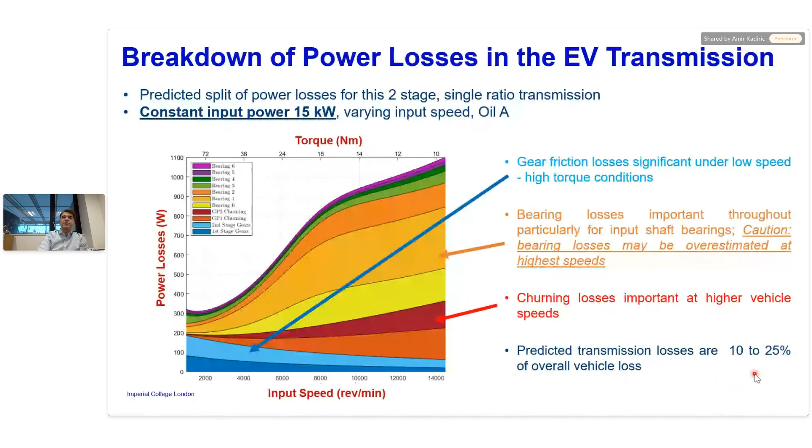When I say churning losses here, I'm only referring to gear churning losses. So you can clearly see this evolution of losses with speed and torque. Overall, if you add this up, our model predicts 10 to 25%, depending on the speed-torque conditions the vehicle is operating at, of the overall loss coming from this EDU, which is the number I started with. This is my summary.

So what can tribology do for EV drivetrain efficiency? I tried to illustrate that designing these e-fluids, and designing the architecture of the gearboxes as well, which I didn't talk about here, is a challenge, and there's a lot of new work on it. It's a fast-changing area, and we are trying to contribute by using tribology on the system level to predict bearing, gear, and churning losses together, to predict the evolution of temperatures as you drive your vehicle, in order to optimize that oil.

Crucially, we don't just rely on modeling. We include the oil properties measured in our rigs so that we can tell the difference between two similar or same oils, and I've illustrated that we can. Our results show that there is indeed an optimum for any vehicle duty, and that optimum is dependent on that vehicle duty—one for WLTP, one for a harsher cycle, one for a less harsh cycle. But the nice thing is that there is an optimum.

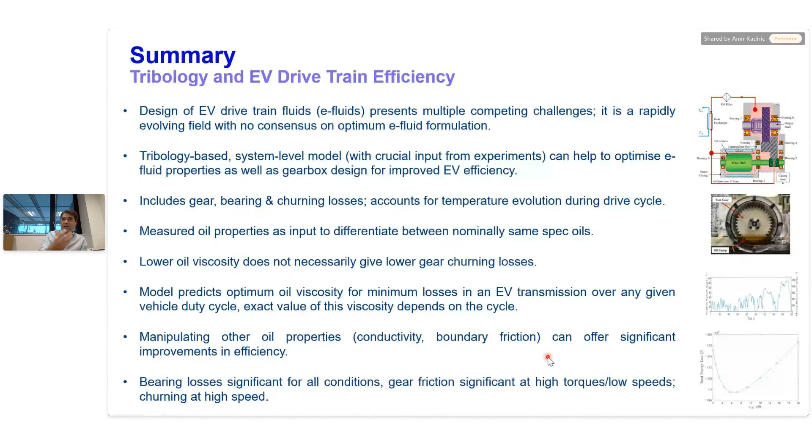Low viscosity is not necessarily a good thing for churning losses. There appears to be no need to go to ultra-low viscosities, and I think the world is slowly realizing that. Manipulating some of the other properties, like conductivity, for example, can have a significant effect. Overall, gear friction is significant at low speed, high torque conditions; bearing losses dominate in the middle range and at high speeds; and gear churning only matters at high speed conditions. So the optimum lies somewhere depending on those conditions and how you drive your vehicle.

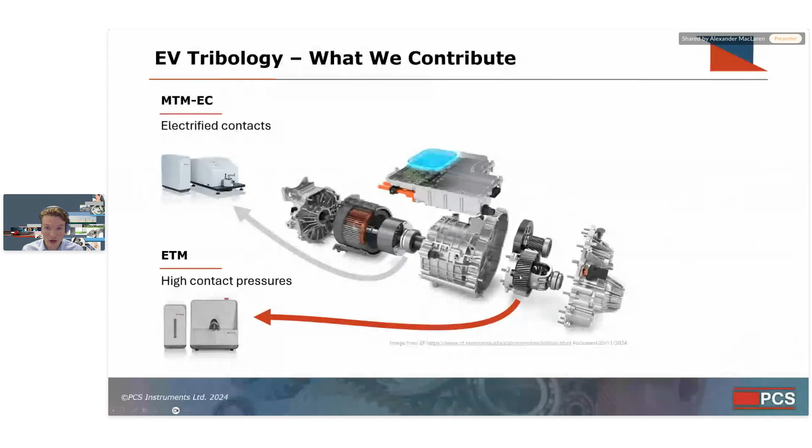As Amir has aptly pointed out, there are several significant challenges in the design and optimization of both EV fluids and electric drive units in EVs themselves. These create a perfect storm for tribologists, because we have high-speed bearings that are electrified, potentially by stray magnetic fields, and so understanding how these work and how the lubricants behave for them is challenging. Equally, we have very high contact pressures, for instance in the low-speed stage of a gear reducer. We have high-cycle components that could potentially fail by contact fatigue as a result of many, many contact cycles over lifetime.

So, for instance, drive pinions, we also have very high entrainment speeds, under which the assumptions underlying classical EHL theory break down. As tribologists, it's really important to understand both these mechanisms, their effects, and the phenomena underlying them. But at present, they are difficult to model accurately, and so experimental data is required. PCS instruments are here to help with that.

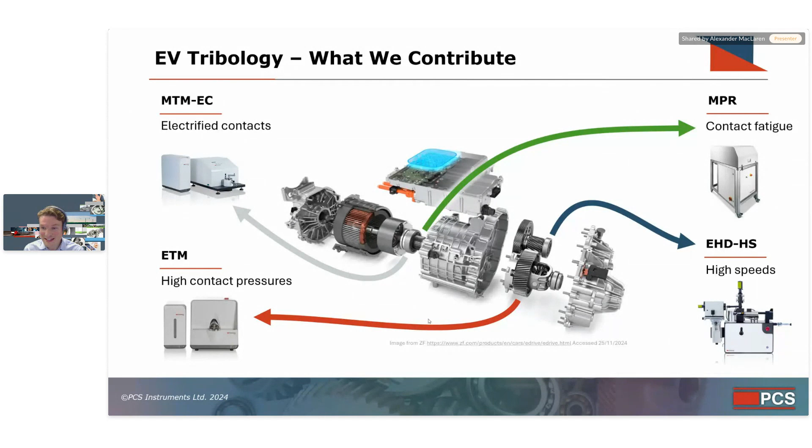The rigs that we design, make, and have supplied for years are applicable to all of these challenges. I'll just highlight a couple of these, and then I'll tell you a bit more about what PCS are up to at the moment, some exciting things in the pipeline, and also how we engage more widely with the community.

So the MTM and MTM-EC, that's mini traction machine electrical contact, or electrified contact, are just ball on disc tribometers. The ball and the disc are driven independently, so you can achieve an arbitrary entrainment speed and slide roll ratio combination. They're loaded against each other to simulate really a bearing, the contact in a bearing. This was one of the first machines able to measure friction in a single contact using materials and conditions that represented a bearing well.

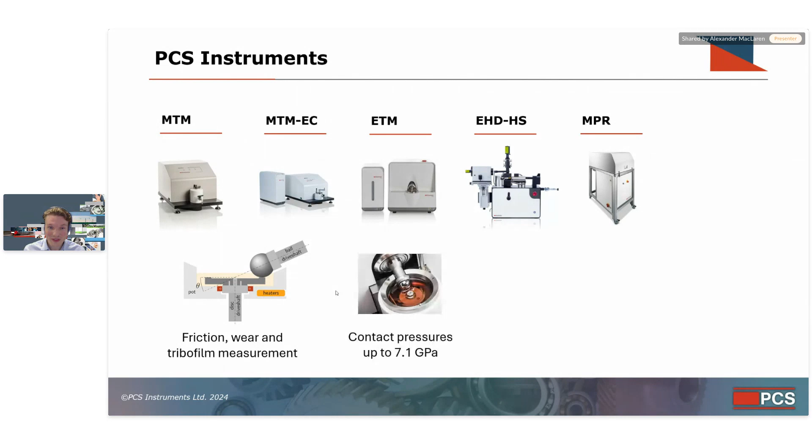It's been instrumental in the development of lubricants and the understanding of lubrication phenomena for several decades. Its younger brother, younger but much stronger brother, the ETM or extreme traction machine, can achieve contact pressures up to 7.1 gigapascals, obviously material dependent, in a circular contact. It's the only machine that can achieve these pressures currently on the market, and that's really good for understanding how lubricants behave under those conditions.

The EHD high speed can achieve entrainment speeds of up to 20 meters a second, and similarly is able to measure film thickness in this quite extreme condition. Some of my work during my PhD showed how strangely films can behave at high speeds as a result of the thermal coupling.

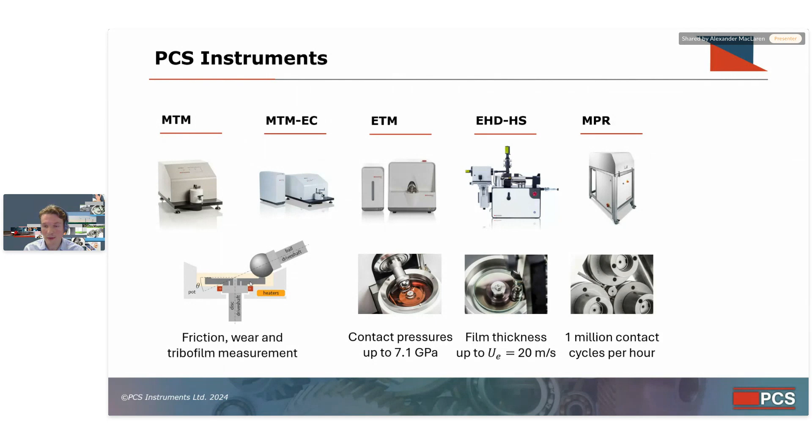Finally, our fatigue tester, the MPR, or micropitting rig, is able to generate 1 million contact cycles per hour. In applications where you might have 100 million contact cycles over lifetime or higher, this means that in an accelerated test, you can representatively simulate that condition in a realistic amount of time. Between them, these rigs provide a really important suite of techniques that allow us to develop the next generation of e-fluids.

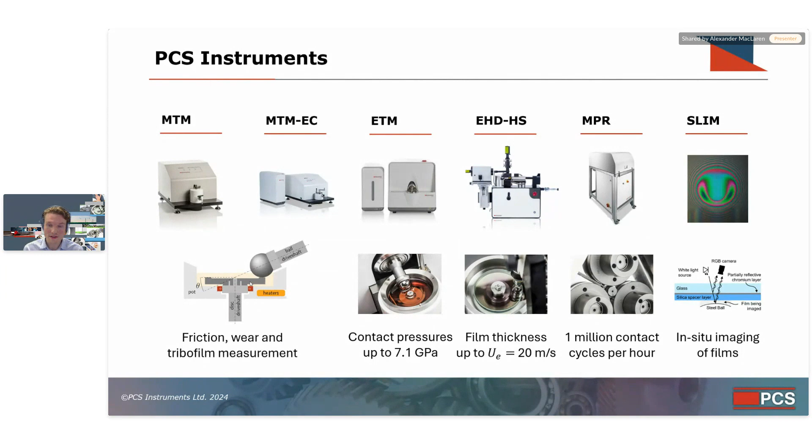Finally, our optical technique, the spacer layer imaging method, or SLIM, enables in situ imaging of both tribofilms and elastohydrodynamic films. When they're behaving strangely as a result of electrical contact or as a result of starvation at very, very high speeds, you can optically see what's going on and start understanding those mechanisms and optimizing those lubricants. I'm just going to briefly show you one example, combining some of those techniques.

This is the MTM-EC, like Amir showed, and a test that you might do. Amir showed that there's an effect on wear; I'm going to show there's an effect on tribofilm thickness. Here I've used SLIM to measure the tribofilm at different times during a test where we've rubbed two specimens against each other in the presence of a lubricant containing an additive that forms a thick anti-wear film. The non-electrified contact creates really quite thick films, while the electrified contact creates much thinner films under equivalent conditions. This is perhaps one of the important things to know when designing a system where the contact might be electrified by stray fields.

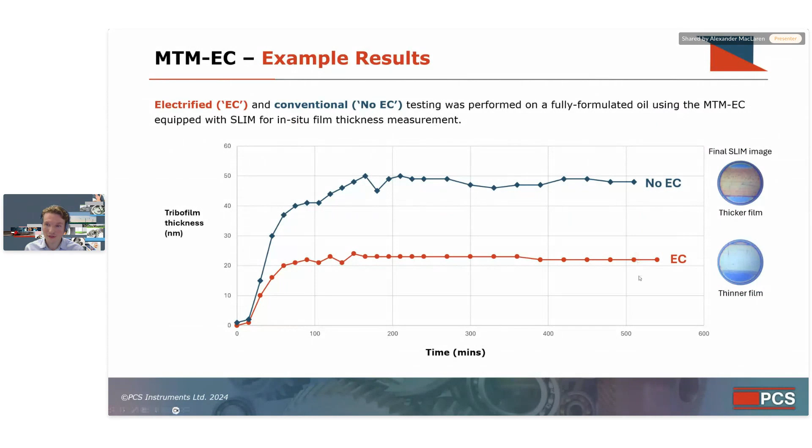So who actually are PCS Instruments? We are a company that makes tribology lab equipment, specifically instruments for testing fuels and lubricants, and a few other things as well. We are just over 30 years old, and we spun out of the Tribology group at Imperial College London, but since have really created ourselves a firm foundation in the tribology community worldwide.

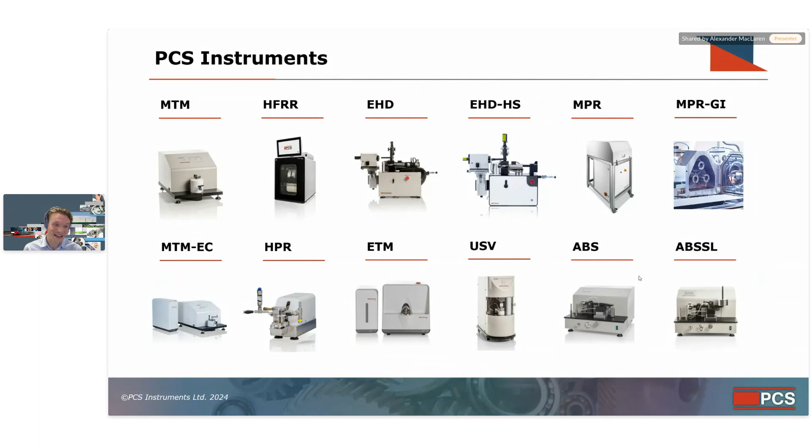Thank you very much, Alexander. It was a great presentation. Great highlights about the app, I've used it before and it's pretty useful. I'm glad you found that. Yeah, I use it all the time, it's just like a quick thing to use. If you have any questions, I'll remain on stage, and my colleagues are here to help as well.